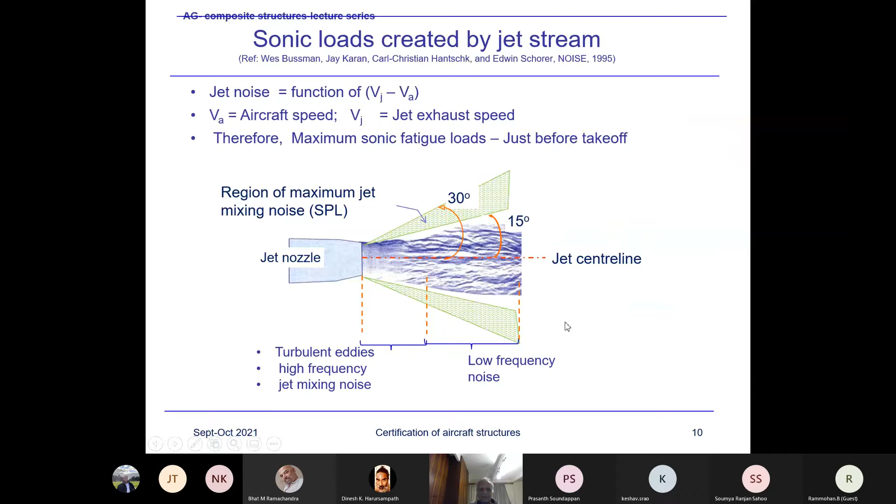Okay, so I think there was some question regarding sonic fatigue when I showed some slides. I think these are the slides which were there in that original certification presentation. And I've got some slides to give the feel of what happens for sonic fatigue spectrums. A lot of testing work has been done by various aircraft industry organizations and NASA to determine what sort of dB levels would be encountered during the various flight regimes. There's a lot of work done by NASA.

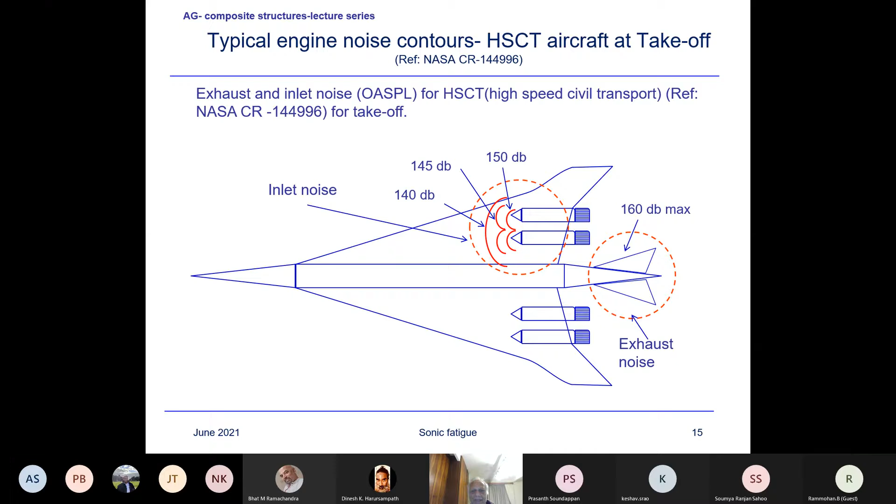So what I have done, I just copied some figures. This one is measured for high-speed civil transport, work done by NASA with the help of other industries, which is published in this report reference. This is showing, for high-speed civilian transport with an arrow type of wing, various contours for the overall sonic pressure levels at various locations of the aircraft. Now, this is all based on test data. Essentially,

they simulate the test during the flight by putting the sensors, and they measure SPL. I mean, they measure the acoustic response, which is then converted through a lot of analysis, which I don't understand too much about, power spectral density, and then to the sonic pressure levels. And then it's converted to OASPL, which is overall sonic pressure levels.

So essentially, these are the contours for various sound pressure levels. And as you can see, in this region where the engine is, the highest noise occurs. It's like 151 decibels, 153, 150. So high OASPL zones, 150 to 153. And as you go away from the jet exhaust, these drop. So they are lightly loaded.

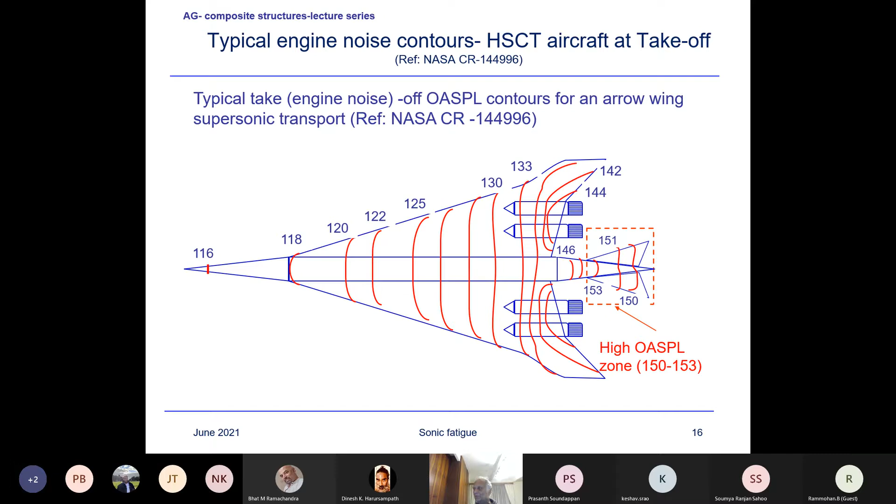If one wants to consider what type of coupons could be tested, I sent one of the test reports on sonic fatigue, maybe last week, where test data for some coupons are given, or probably that can be found in some AGARD report and ESDU sheets also.

Some of the slides here show typically the sound pressure level, SPL, with octave band frequency, because this can be converted to either octave band or 1/3 octave band, the response, sonic pressure loading versus frequency. And using this, one can also analyze the response.

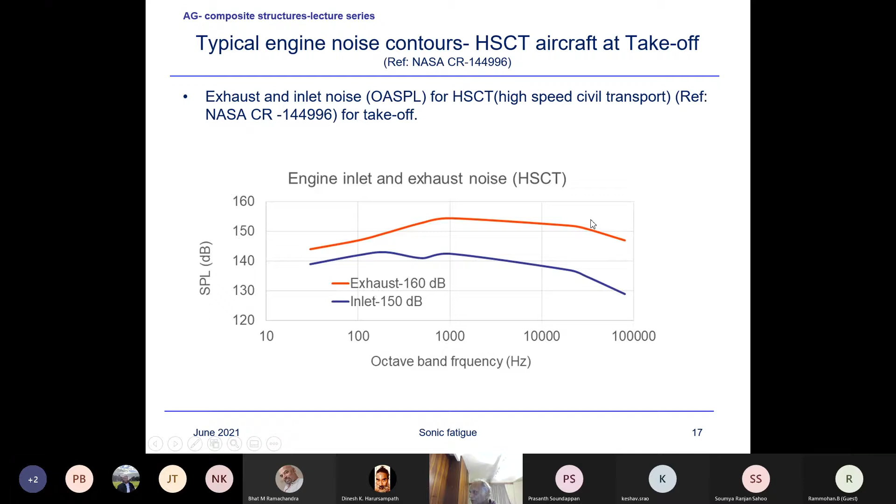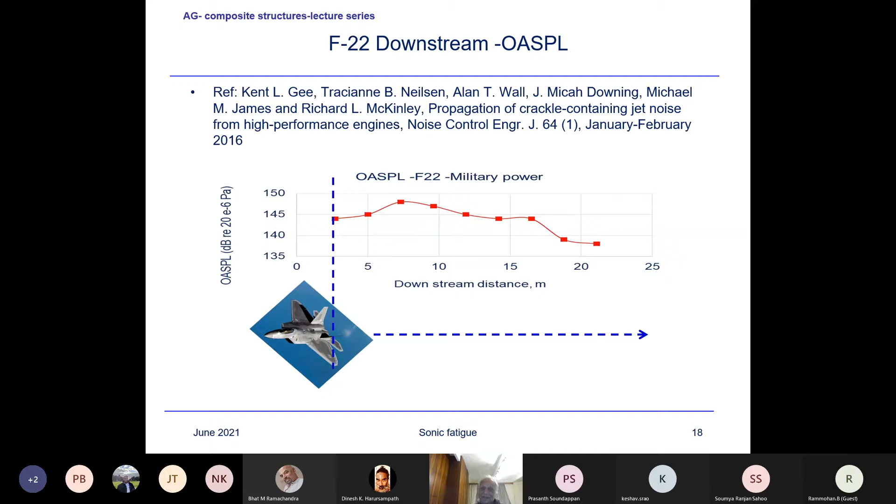And this is for a military aircraft like the F-22, downstream. Here the jet engine is the reference, and you can see for the F-22 how overall sound pressure levels vary as you move downstream from the jet. So it's a typical example. There are a lot of references available, and those who are interested can read in detail about sonic fatigue loadings. But I just wanted to give some idea.

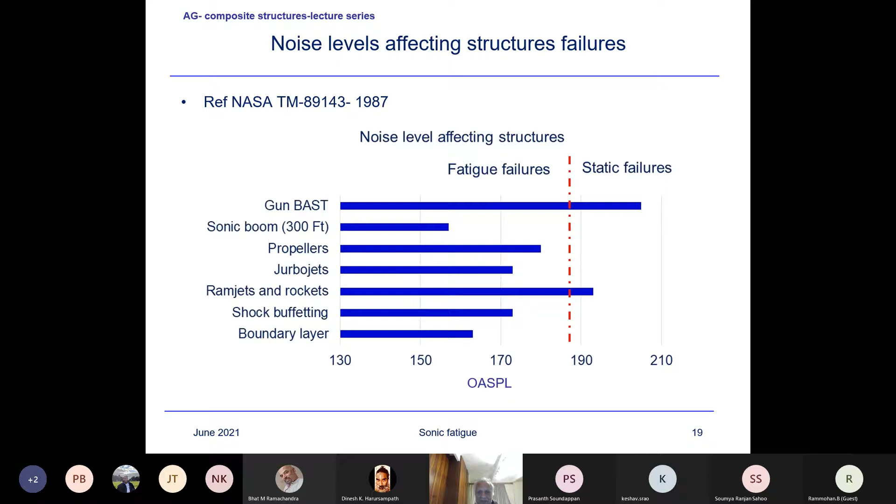And this I've taken from one of the NASA reports, which shows the fatigue failures and static failures for the noise levels which are created. So you can see gun blast, sonic boom, propellers, jet engines, all that. It's not very important. And this one I showed.

Okay. So what happens for the analysis? I'm only trying to state a few points, and the details are given in the ESDU data series, if you have access. Suppose you have a panel and the noise is generated. The panel will respond to the noise spectrum, and it will create some kind of sonic pressure loading with frequency. There will be a number of frequencies generating it, and then one can determine the SPL variation.

Okay, now, there's a relationship for determining what happens with this response when you want to determine the fatigue margin for failure of the joint, or wherever maximum stress occurs on the panel due to sonic fatigue. So you want to determine the margin. Usually one can use the procedure from ESDU.

So the response SPL is a function of RMS pressure. The SPL is nothing but pressure application, so it will be fluctuating pressure applied to the panel. The panel will be vibrating, and it will create several modes, mode 1, mode 2. Now you will determine the lowest mode natural frequency for the panel.

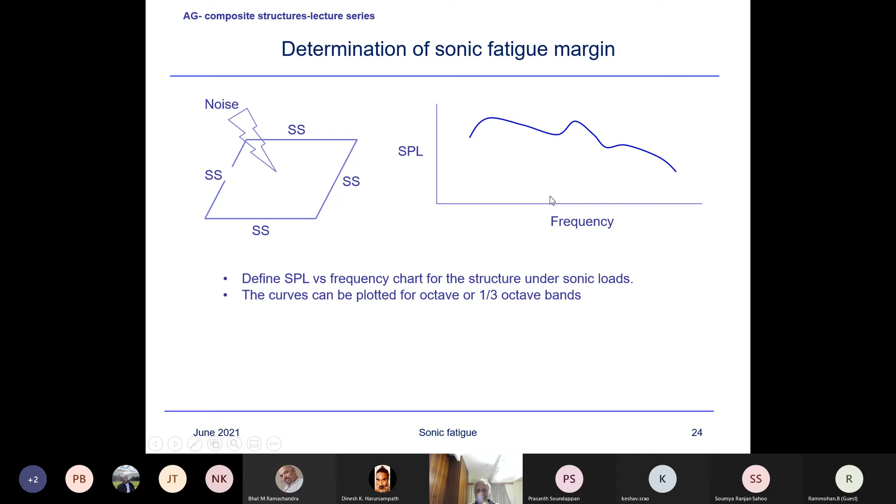The knowledge which we have from the fatigue spectrum is SPL, which is sonic pressure loading. And from the frequency calculations for a particular type of panel, like simply supported, fixed, curved, rectangular, or any type of panel, you can use the handbook or methods from either ESDU or some other references or AGARD reports to determine the natural frequency. So essentially the sigma RMS stress is equal to pi by 4 delta Fn function.

This is natural frequency. GP is spectral density of acoustic level at fundamental frequency. Now this is the parameter which has to be determined using the handbook. I don't have a simple relation for this one, so I have not written it down. This has to be determined from ESDU data series for the noise, that is for a particular SPL. So I've defined modal damping ratio delta, and Fn is of course the natural frequency.

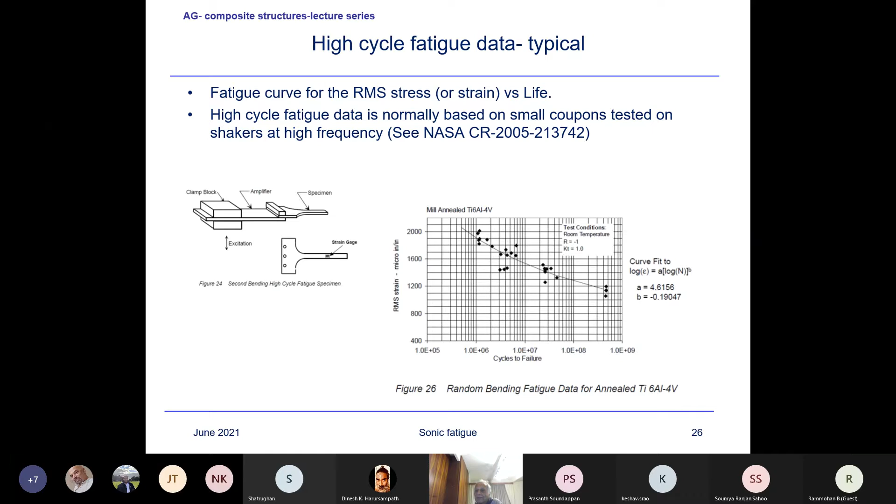Now somebody asked about the temperature. Yes, temperature. If temperature is affecting a particular region, you have the temperature correction factor or some SN curve available for the temperature effect. And that one can find in ESDU. Using that with the temperature, you can determine the margin. So this is only a general method, and it's not a very detailed procedure, but it is just to give you a feel for how you can determine it.

Any questions? Somebody asked a question regarding some details on sonic fatigue. Is it enough or do you need some more information? Yes, sir. I have gone through whatever you have referred and sent us, sir. It's enough, sir. That's enough. I'll go through it. So is it okay? Yes, sir. It is useful, sir. So do we have access to ESDU data series? I'm not sure, sir. Okay, NAL does have it because NAL has used this procedure.

Okay. Sir, only one small thing: when we design for RMS value, there will be some loads which will still be higher than the RMS value, like a peak load, right? So will that also be automatically taken care of? Well, if it's a dynamic effect, with the sonic one there are two things being done here. You are analyzing the sonic spectrum over here. Then, in fact, there are mechanical loads coming into the picture over the whole of the fatigue life.

What happens? The sonic fatigue occurs, say, during takeoff only, about 1 minute. And then you have a mechanical cycle with loads going on. Now, normally one would have a mechanical fatigue analysis, and combining that mechanical fatigue and acoustic fatigue, the final margins will be determined. So you're right, there would be some higher loads in different cycles. So that should be taken into account.

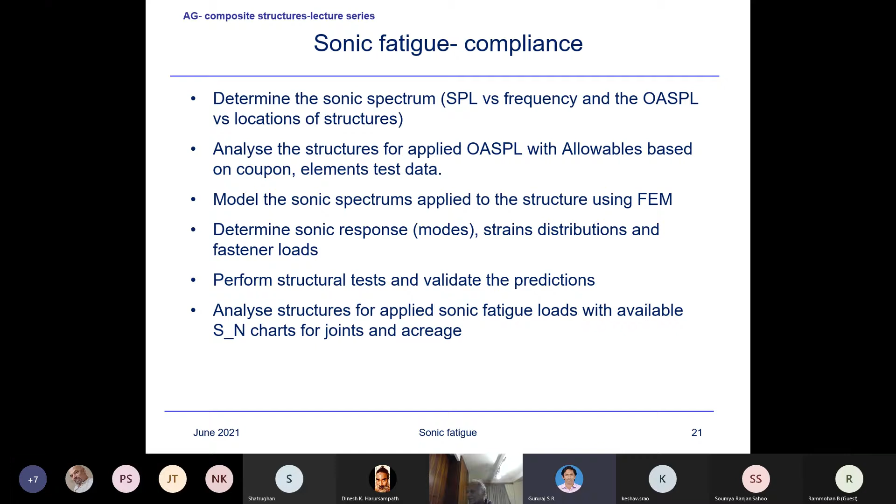Okay, sir. Fine. In fact, I deleted one of the slides from here. Let me just pull out another presentation. Okay, now. The question which you're asking is, okay, let me just show. I should have included that, but I deleted that slide from here.

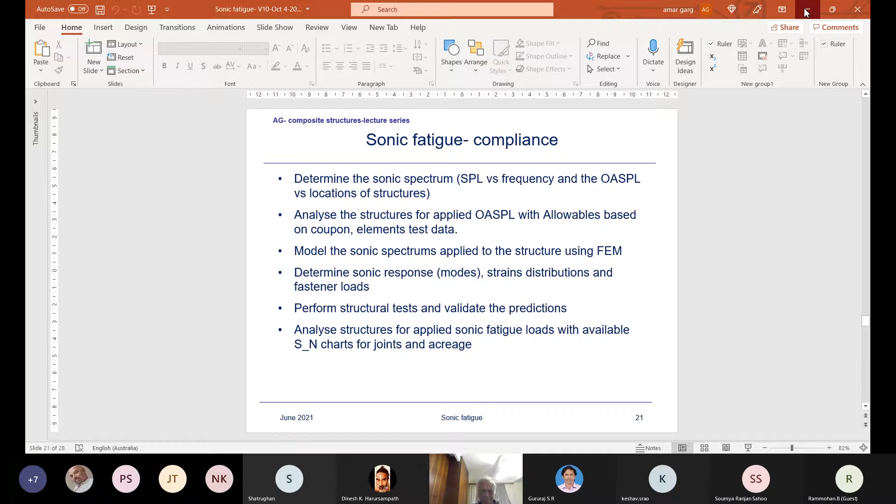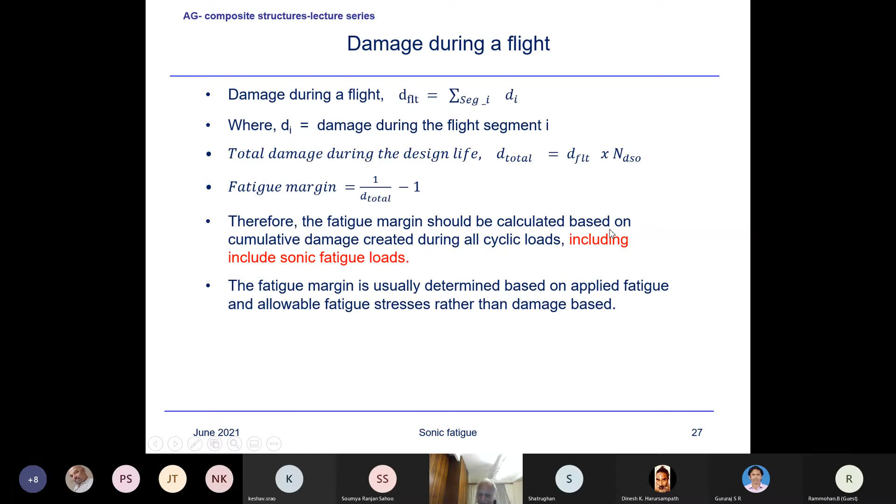So you're right, there were higher mechanical cycles. Yes, one has to consider a full flight envelope. Okay, sir. In fact, this question was asked by ADA people also, and that is how I prepared this chart for them, to demonstrate that the margin has to be considered for the total damage, not only this local sonic fatigue.

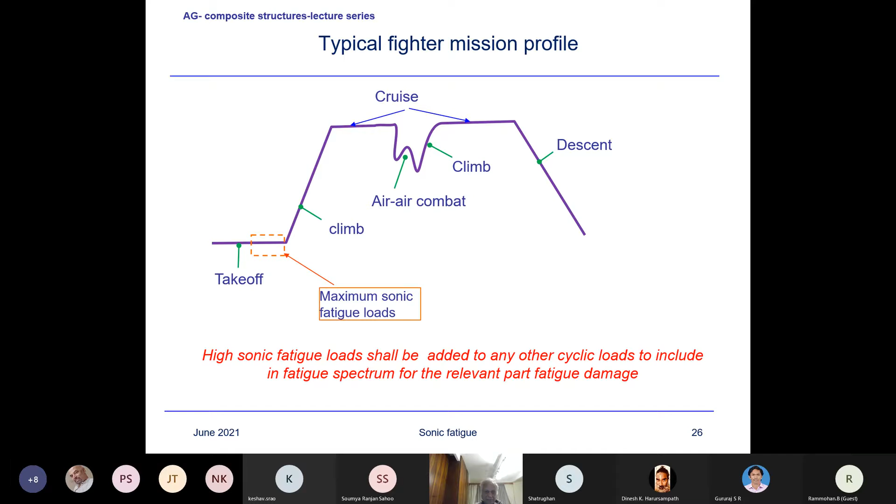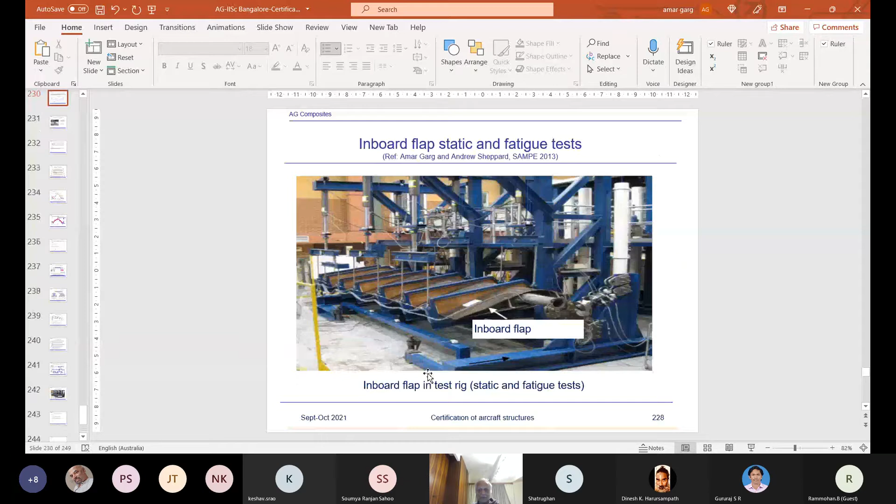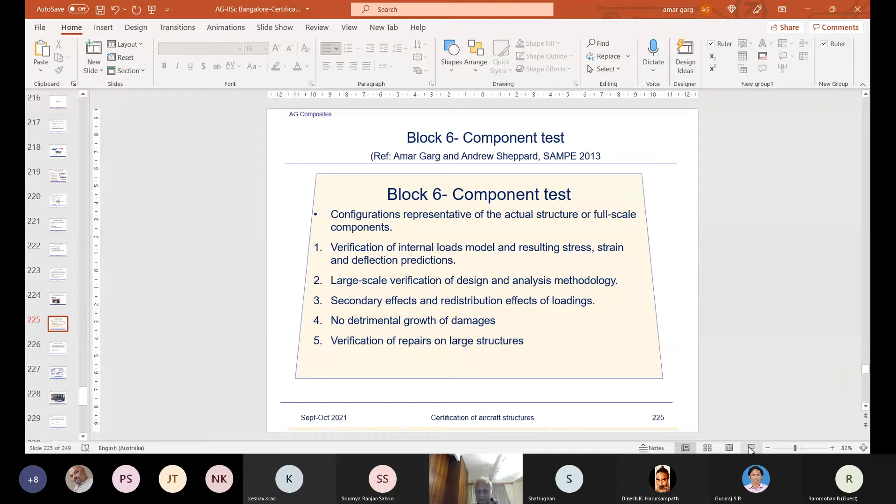Okay, now I'll just close this and go to the main presentation. You can see this presentation now, component fatigue test? Yes, sir, we can.

Okay, so this is what I wanted to complete last, because this is an important test for the aircraft, and as I had said, the regulatory requirement is to demonstrate the fatigue compliance of the aircraft by full-scale test. This is a component test, but in the end I have taken a slide from Boeing for the 787 fatigue test, and we can run the video a couple of minutes.

Now, the objective: a component fatigue test for this inboard flap was performed. The principal structural elements for the trailing edges are outboard flap, inboard flap, and aileron, and the flaperon is non-principal. So to demonstrate fatigue compliance for movable trailing edges during the 787 program, we tested only the inboard flap and demonstrated the equivalence to others.

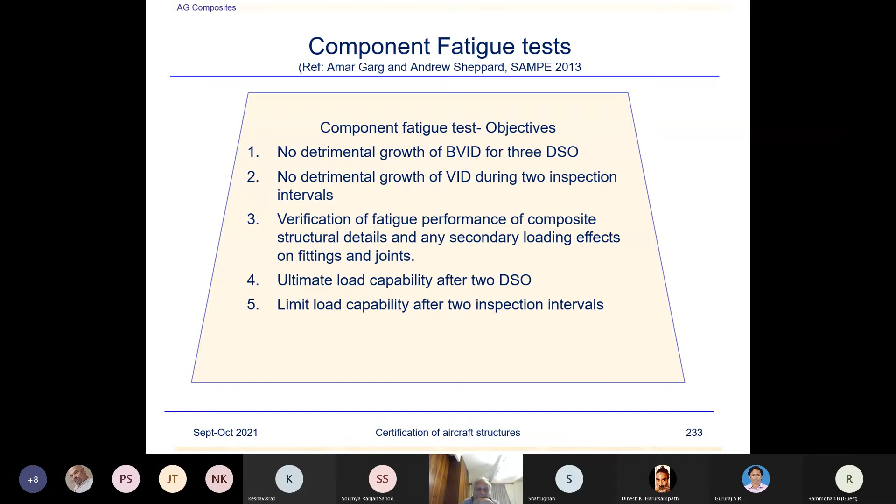Verification of fatigue performance of the composite structural details and any secondary loading effects on fittings and joints. Ultimate load capability after 2 DSO. Limit load capability after 2 inspection intervals.

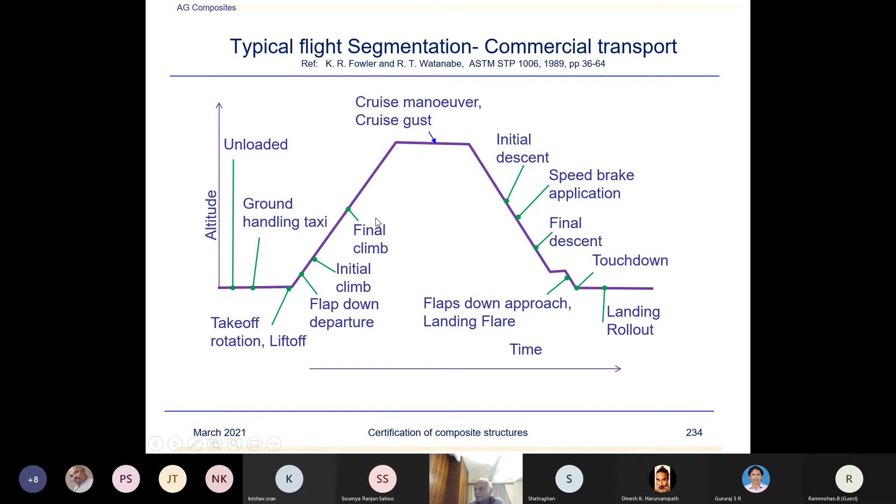Now, typical flight segmentation for a commercial transport. The flight profile: takeoff, rotation, lift-off, unloaded, ground handling, taxi, lift-off, flap down, departure, initial climb, final climb, cruise, maneuver, gust, initial descent, speed brake application, final descent, flaps. During each of these segments, there are thousands of fatigue cycles applied on the aircraft.

Now, in order to generate the spectrums for fatigue, a lot of analysis is done, and I won't go into the details of how you derive the fatigue spectrum from the loadings.

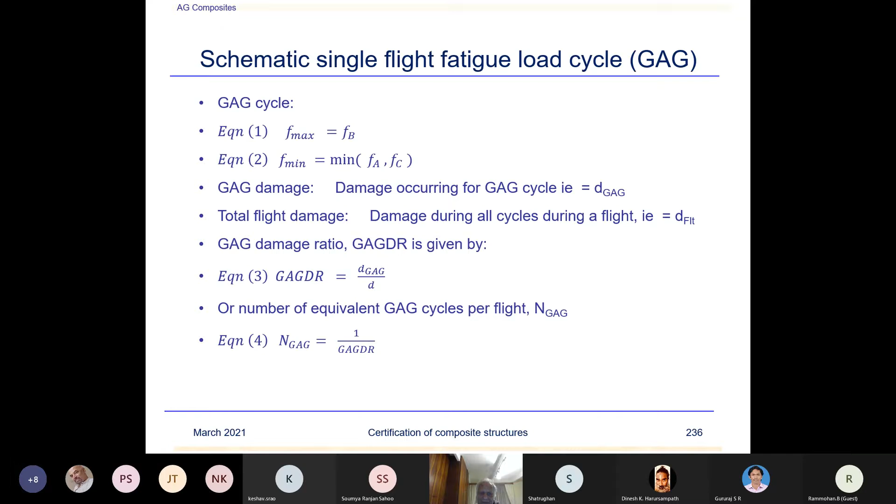Once we have a GAG damage ratio defined, then we can define the number of equivalent GAG cycles per flight. We want to define GAG damage ratio in order to generate the equivalent GAG cycles. How many equivalent GAG cycles will give me the same damage which is created by all these thousands of cycles of different amplitudes? This is handy in determining the fatigue margins for the structures. I just wanted to show this as a definition, because if I'm talking of GAG damage ratio and somebody asks what is this, that's why I thought I'll try to explain.

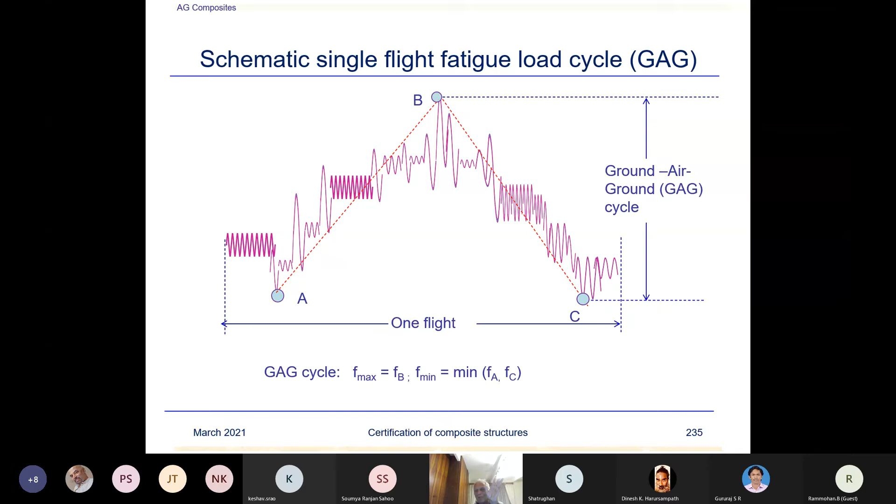So full scale test, generally what happens, suppose you have a metallic part. Now metal is highly sensitive to the fatigue spectrum loading, low-high, high-low cycles. When you want to test a component or subcomponent for the metal, you have to apply the right type of spectral loading in order to capture the effect of the load sequencing. It's very important.

However, if we are testing a composite structure, we can take advantage of one phenomenon: composites are virtually not affected by the load sequencing. Whether you're on high-low or low-high, it has insignificant effect on the life. But in metals, it can have a drastic effect, as I showed with the Comet failure test, where they caused the overloading effect, which gave an artificially very high life. So it is very risky in metallic structures not to use a proper type of fatigue spectrum.

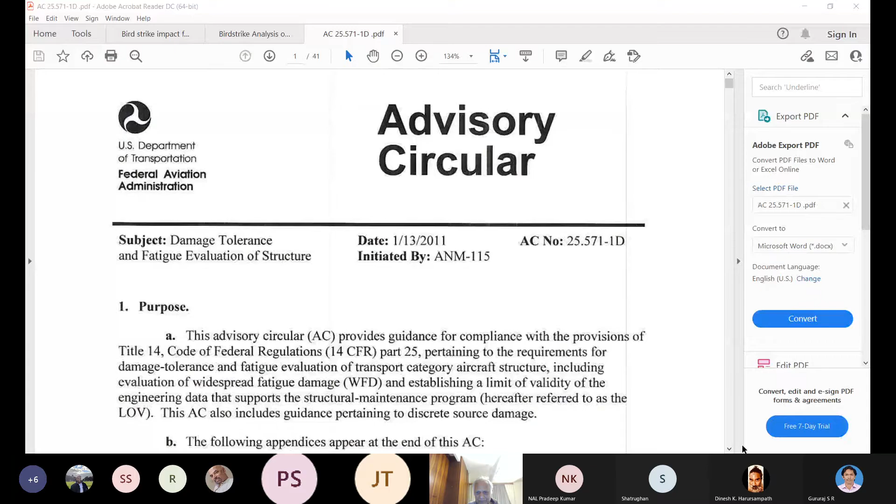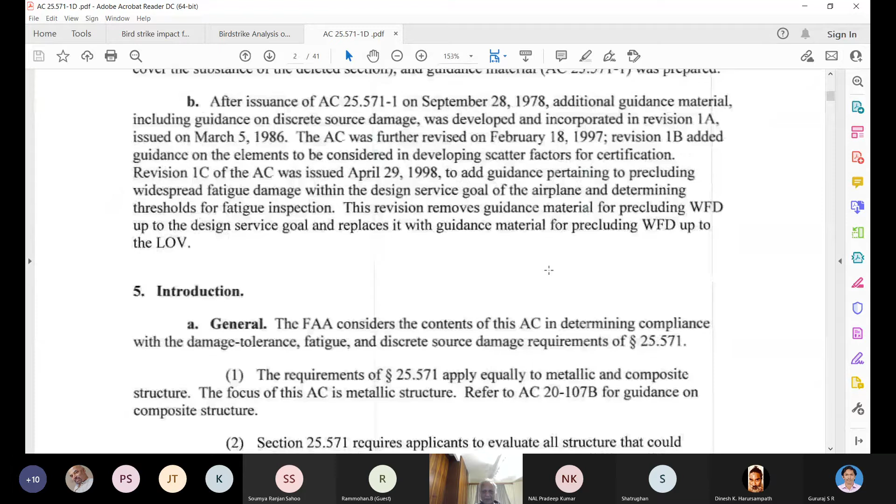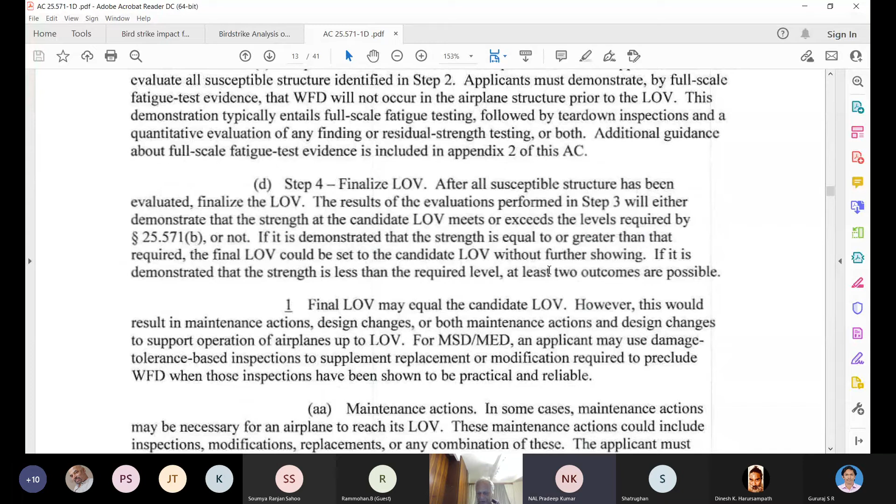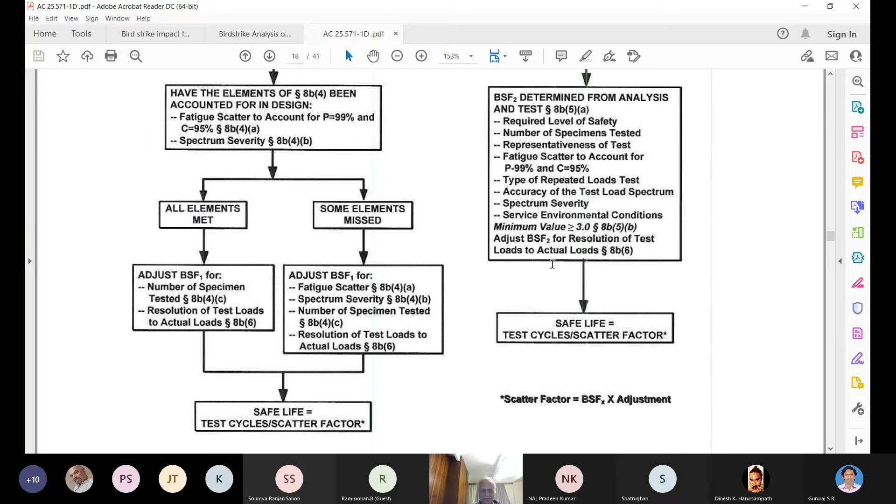Okay, this is the one, advisory circular 25.571-1D, and it provides all the guidelines. Here I'll show you the fatigue guidelines for these structures when you are testing, and one has to meet this requirement. So for a metallic structure, it's very clearly written here - this is a requirement from the safe life point of view.

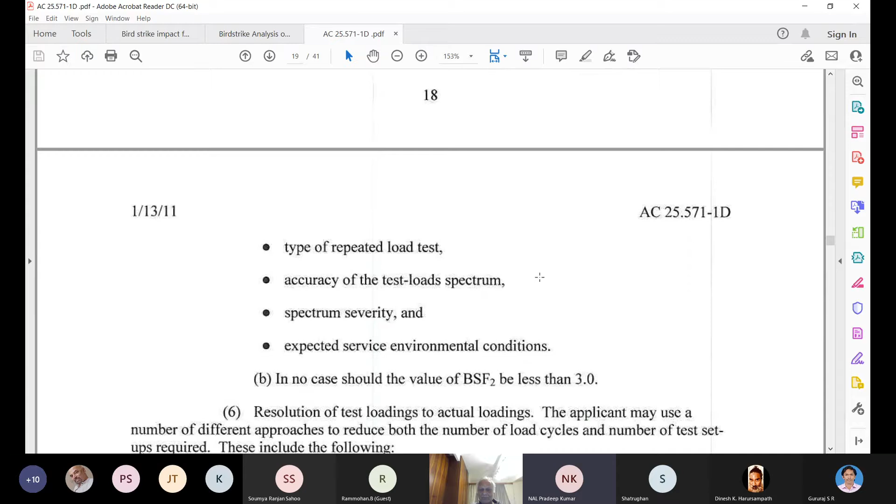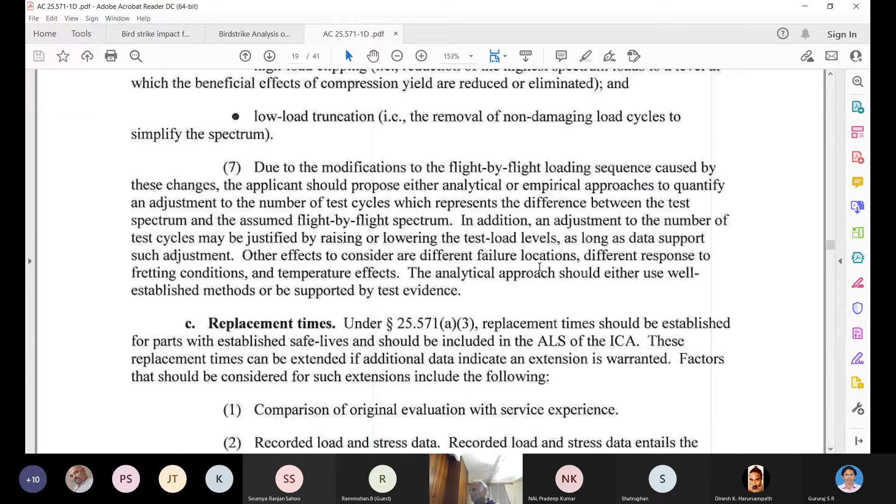Sir, we have to do both safe life as well as damage tolerance, both approaches we have to use, sir. No, safe life you're not doing - you're not trying to determine a safe life. Actually it's a damage tolerance approach. But there's a requirement for the aircraft to be tested. The requirement is design life, whether it's a metallic structure or a composite structure. The full component has to be demonstrated through design life.

And for a metallic structure, you would do the cycling loading using spectrum loading. So you have to decide about the spectrum loading properly and run for 2 design lives - that is a requirement. Sir, this spectrum loading we have to find from the mission profile of the aircraft, right sir? Professor, yes it is - it is a mission profile which has to be analyzed, and it's not easy actually. It's a very complex method which Boeing uses.

Sir, Professor, is it possible to get from the literature any reference to find the load spectrum? I have the mission profile, Professor, I want to determine the load spectrum. Yes, I can send you the reference. There's a full ASTM STP written by Mr. Watanabe - he was a Boeing employee, earlier Boeing engineer. He had done a lot of work, and it's in public domain because he was editor for that ASTM STP. I'll send you that paper also - I think I copied it.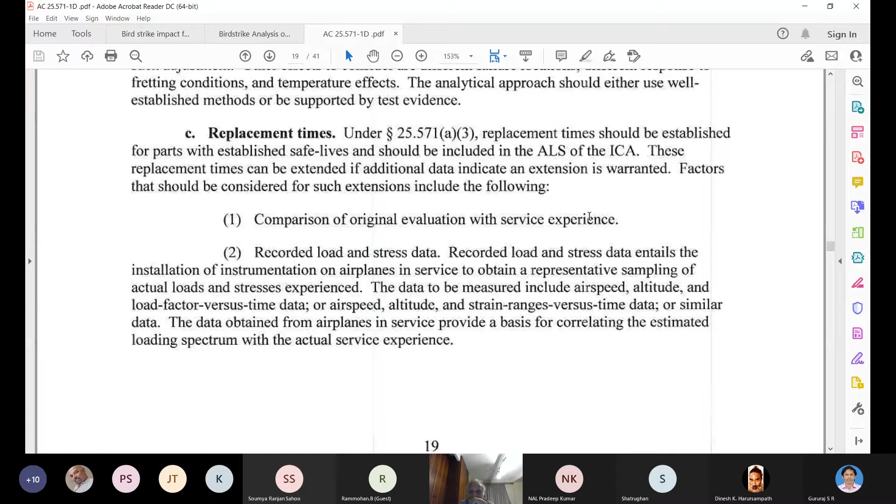But in general, I'll send you the references, and probably you might get some feel. But yes, you are right. This 571D provides the guidance for safe life, for damage tolerance, as if you look into that FAR requirement, it's 2 design lifetimes for damage tolerance. And then there's widespread fatigue damage. There should be no damage occurring during that time.

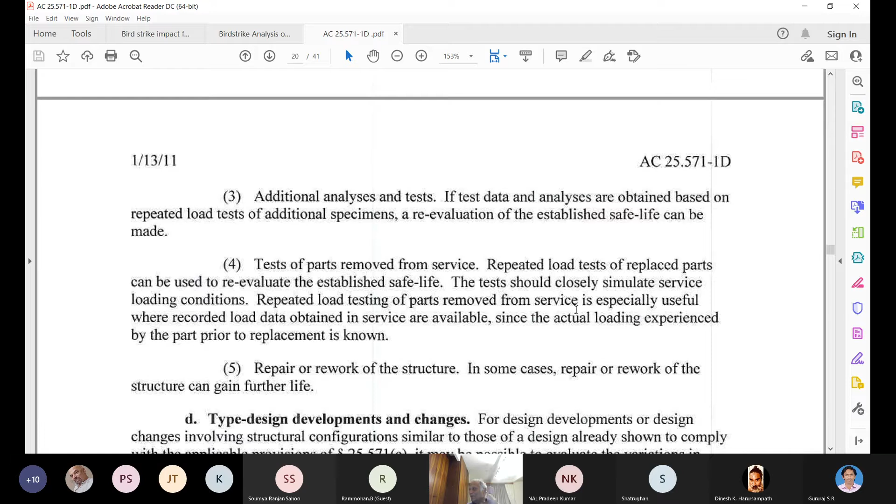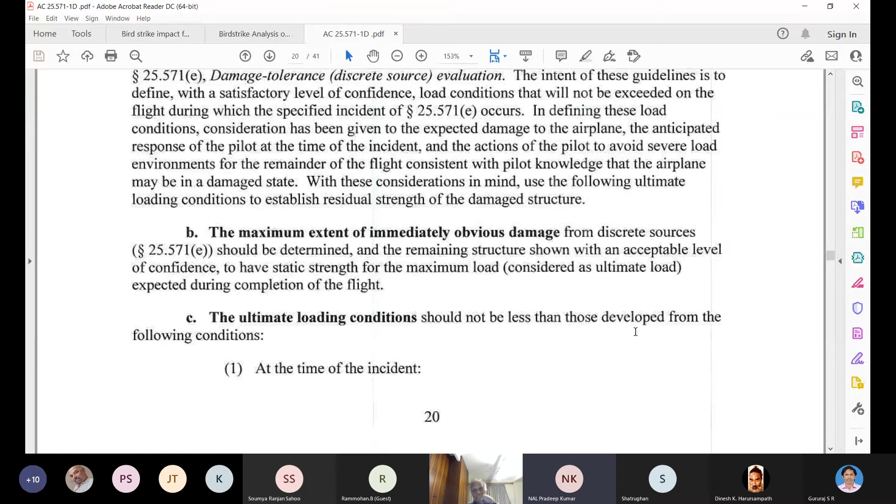So what do we do, Professor? We'll find the critical component in the fuselage. Okay, 1 or 2 critical components, and we'll do the SN approach, find the life, as well as crack growth study also we'll do for the damage tolerance analysis.

And damage tolerance analysis you have to do for each of the parts. There would be a lot of analysis because for different fasteners, you have to consider how much is the minimum crack length assumed, and then determine and calculate the widespread fatigue damage if it occurs. So of course you have to cover all the critical areas, you can just highlight some zones where the criticality is there and try to analyze the structure.

This is again a very involved procedure by the industry. Once again, Boeing has got its established procedures over such a long period of time. They have the handbooks, computer programs, hundreds of people working in that group on fatigue and damage tolerance, and they do all that work.

So yes, Professor, we also have our aircraft program for which I am actually responsible for determining the load spectrum for the fuselage. So that's what I do at NAL, Professor, and Professor Dinesh Kumar happened to be my teacher during my PhD at IISc.

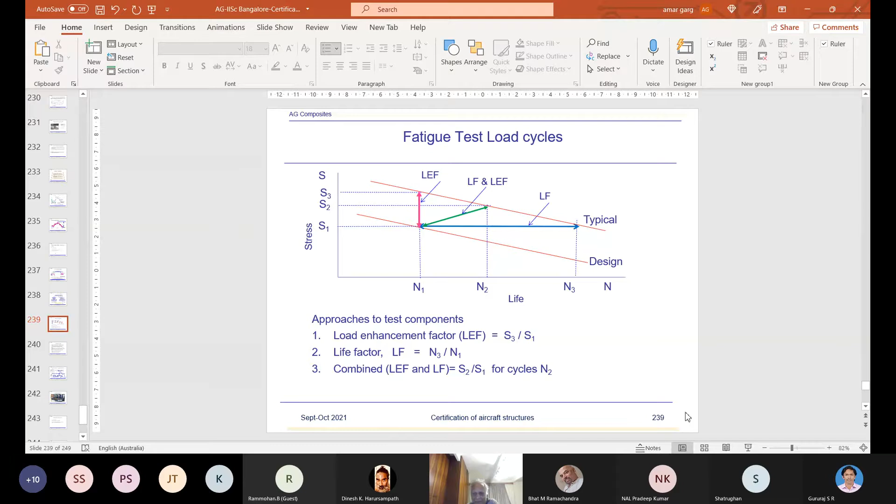Sir, you told about life factor. So as far as I understood, first we do some coupon level testing, then we find the load factors, and then while doing component level testing we use these load factors, right? You can calculate both life factor and load factor from the same coupon. Oh no, I'm talking about metals, not composites.

Okay sir, what about when we do damage tolerant design and calculate fatigue life using the famous Paris law with sigmoidal curves? Well, damage tolerance doesn't use this curve. Because there you need the dA by dN, Paris law, dA by dN charts, and the stress intensity factor. This is when you're trying to use the endurance limit approach, then this is useful. Otherwise, damage tolerance uses only dA by dN.

Yes correct sir, that is in the Paris region, na? Yes, Paris law, classical. And then of course you apply lots of correction factors like accelerated crack accelerating or decelerating, depending upon the cyclic loading, compression, tension, overloading. So there are a lot of factors going into that. And in fact there's a publication written pretty good by one of the Boeing engineers.

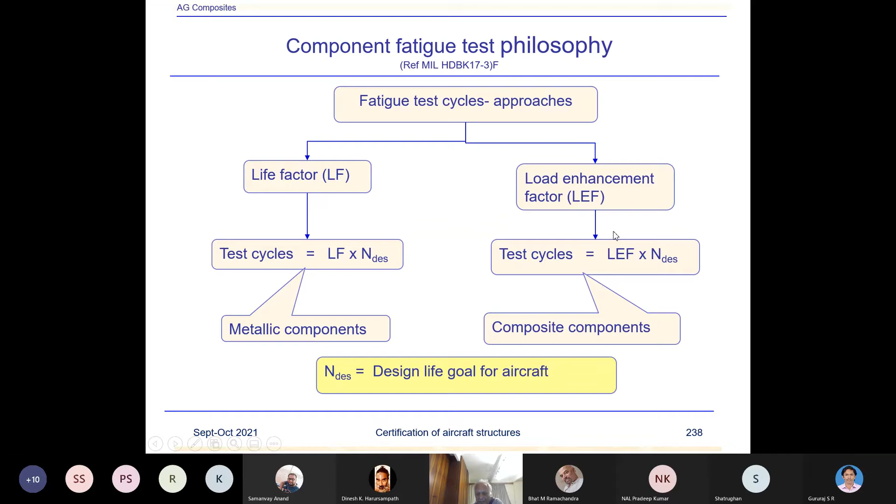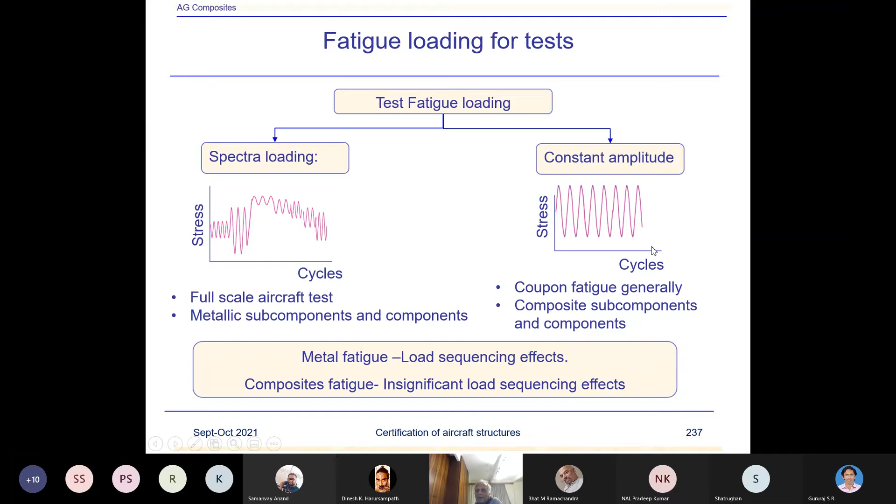Okay, next one. Fatigue test article. So we are talking of, say, inboard flap fatigue test here. Basically for this flap testing we use this method and constant amplitude loading rather than spectrum loading, and I won't go into the details of why we chose that.

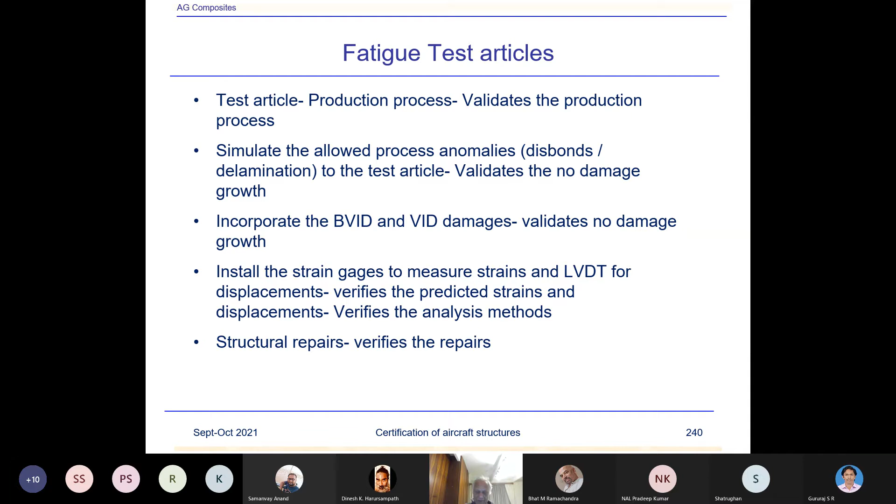So the fatigue test article was created with all the damages which we wanted to study, BVIDs, VID, to determine a particular life. So I'll go into the test flow. Say a test article with production anomalies like disbonds and undetectable damages like BVID. Mounted on the test rig, then of course a strain survey just to verify that all the systems are working okay, strain gauges are working okay, and then you start the fatigue loading.

So here we consider, say, 2 DSLs. 1 DSL, then you stop the test, visual and NDT inspections. Then again you go to another DSL. So this is the requirement. Basically, the FAR requirement is for 2 DSL with the appropriate load enhancement factor. So we tested this for 2 DSL, 2 design service lives, with an appropriate load enhancement factor. Because we were not applying a spectrum loading, we applied the enhancement factor. That was the reason. In order to generate 2 DSL life.

Then we loaded to static limit and ultimate loads, in order to verify after 2 DSL that we still have the residual strength available to the ultimate load carrying capability as per the requirement. Then we introduce the visual damages. Visual damage, slightly larger damage, like an impact using a 4-inch impactor, say, a visible damage which is easily visible during walk around inspection.

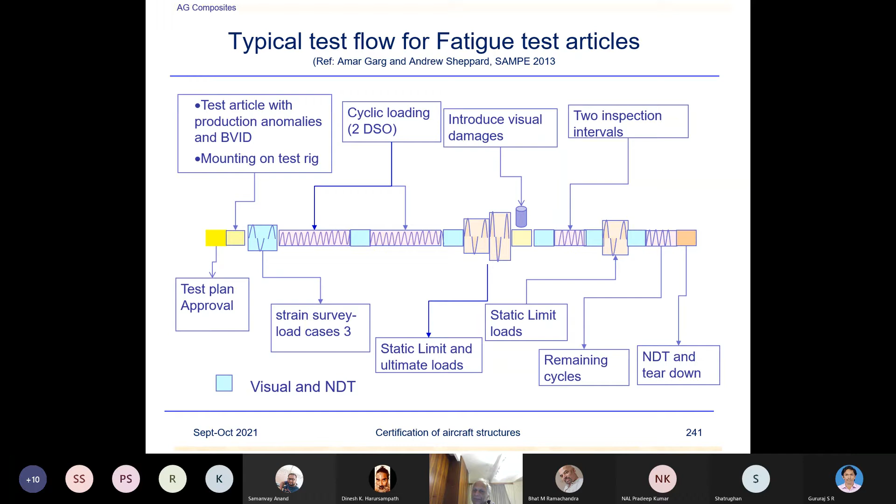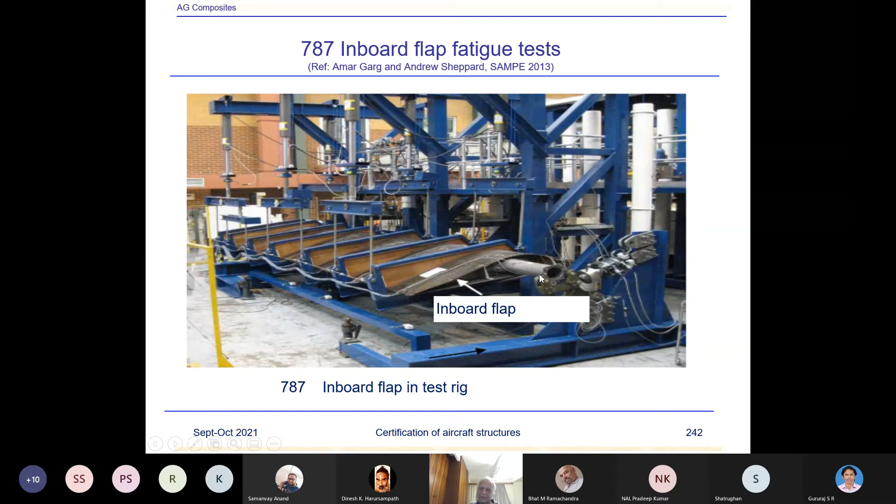And then, of course, NDT and tear down inspection. We found no damage to the structures anywhere. And that is how, using the fatigue test article, compliance was met for the fatigue test. This is just showing the flap, which is similar to the static test. Okay, so inboard flap fatigue test summary. The inboard flap fatigue test was successfully performed without any damage growth. Design service objectives were met. Based on the inboard flap fatigue test, other MTE structures were validated to meet the regulatory requirements. So that is how it was completed.

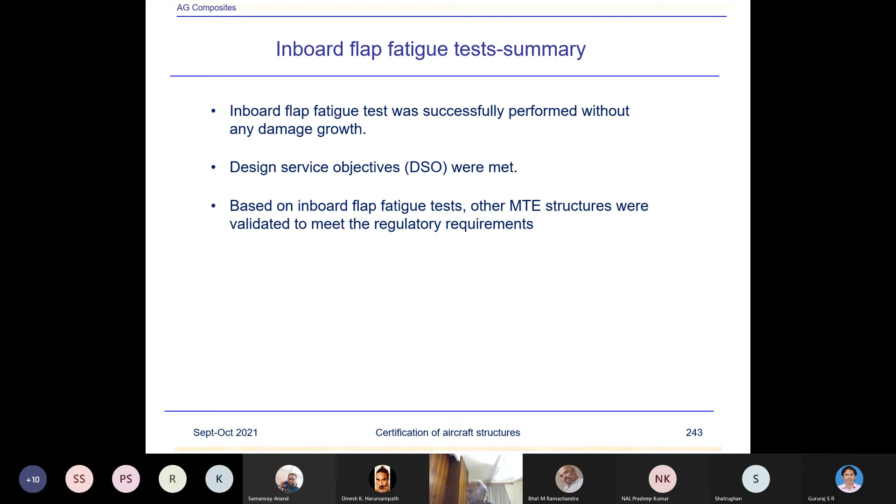Okay, now this completes the 787 movable trailing edges discussion regarding the certification process. So that is the end of this. And then I have just put the requirement for the full component test. Of course, this was not done here because it was not our responsibility. We were only for the main movable trailing edges. Headquarters, Boeing Seattle, had to demonstrate the compliance requirements for the aircraft by testing the full-scale aircraft. So it was done in Seattle. For a couple of minutes, let's see this video.

So it's not playing. Oh, sorry. No, we are not able to see it. So how do I make it? Does it go to the presentation? You will have to share the browser where YouTube is playing, instead of the slide. Is it okay now? Not yet. So how do I see? You have to share that screen where YouTube is playing. Okay, let me see now. I don't see it on my screen. Share. Are you able to see now? Yes, we can. Okay, so I'll start from the beginning again.

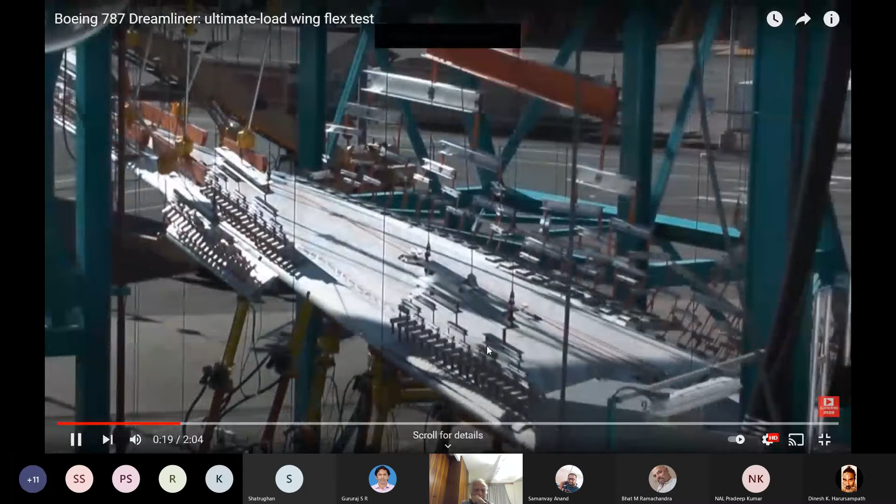How much is the wing deflecting?

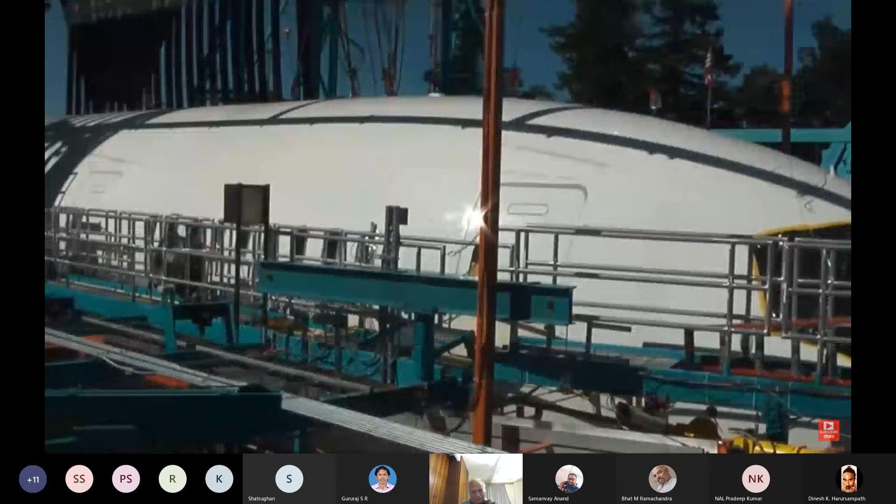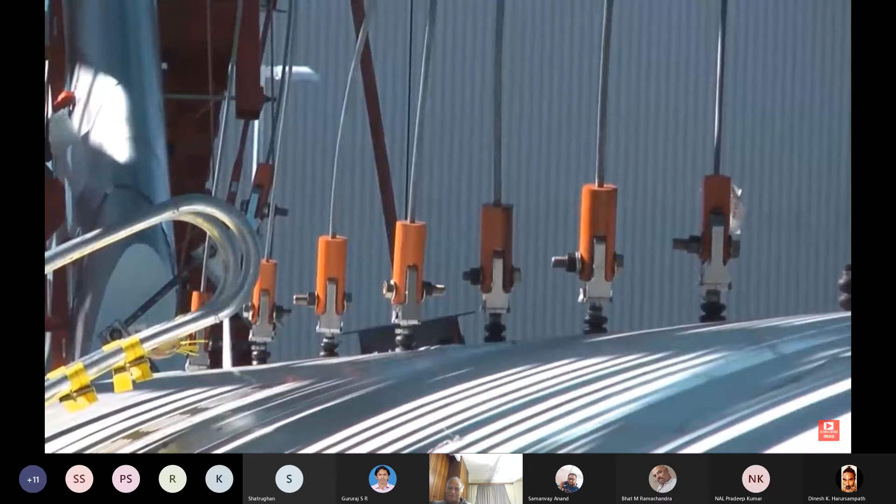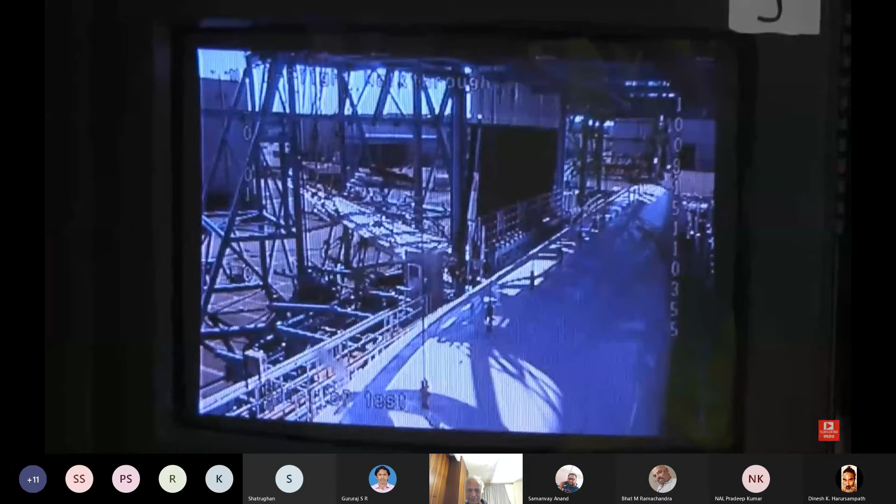Is there any sound with the video, Dr. Garg? Because we are not able to hear. Pardon? Is there any sound along with the video? No, there's no sound. This music which is playing, that's the only sound. Can you hear some music? That's it. I think this one can be stopped now. So essentially this, okay. Oh, sorry, it started running some other video. So basically, you can watch it again on YouTube.

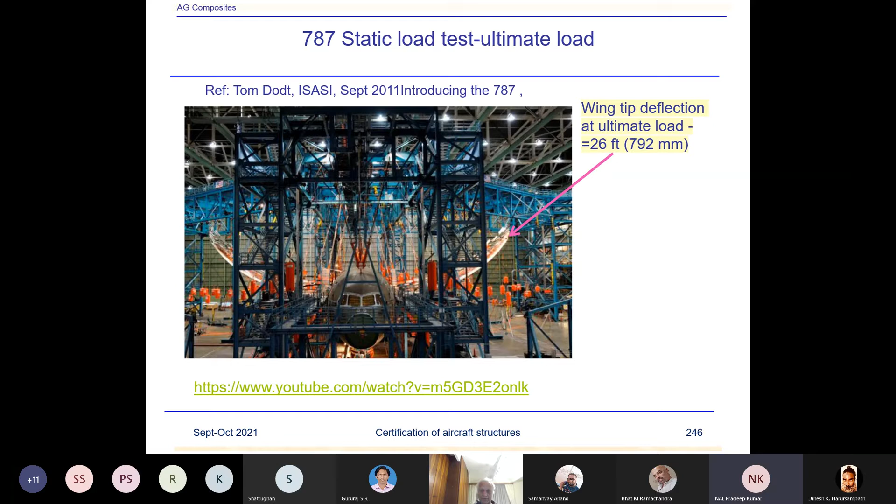Okay, now it's a good question. Can you see the screen? Yes, professor. Yeah.

Okay, now read this requirement. There's a mandatory requirement from the FAA that a full-scale fatigue test of the aircraft has to be done. As you can see, the airworthiness limitations section of the instructions for continued airworthiness required by 25.1529 must specify that no airplane may be operated beyond a number of cycles equal to half the number of cycles accumulated on the fatigue test article until such test. So current regulations require the full-scale fatigue test of aircraft, and this is mandatory.

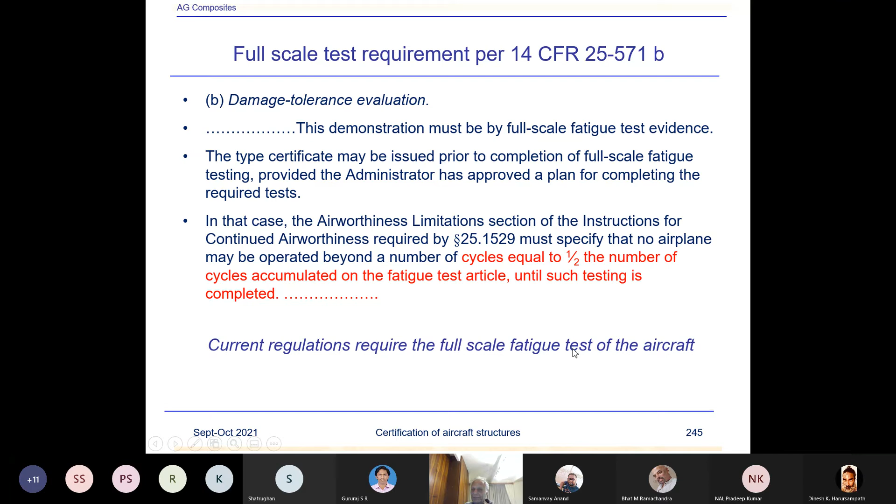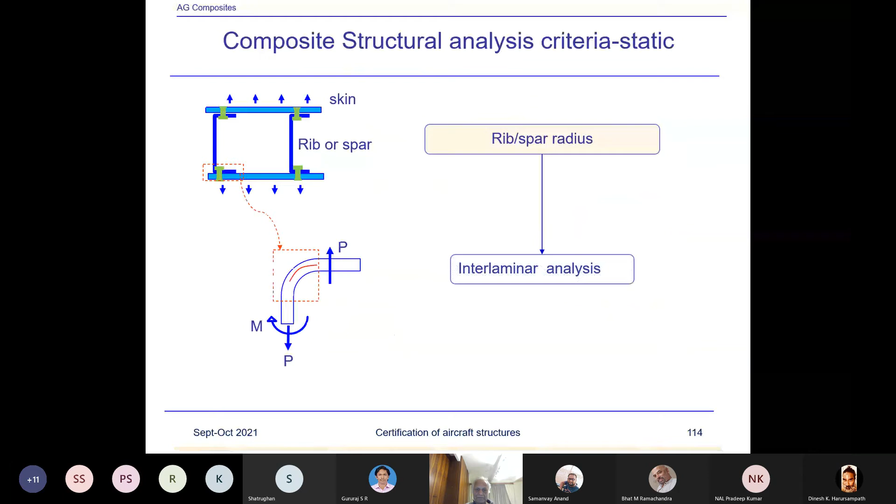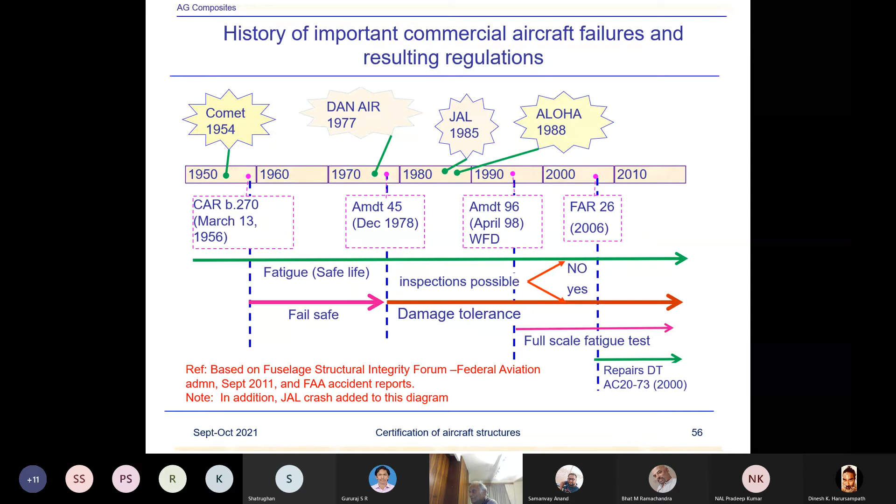Now, if you look into this diagram, which I showed in damage tolerance, let me go back. This diagram, history of important commercial aircraft failures and resulting regulations. When the Aloha aircraft failed, then the requirement of widespread fatigue damage came up. And then the FAA imposed a requirement that the full-scale fatigue test is required. So the FAA will not approve any aircraft design until the fatigue testing has been shown. They won't certify.

Sir, is there any certification for thermal fatigue?

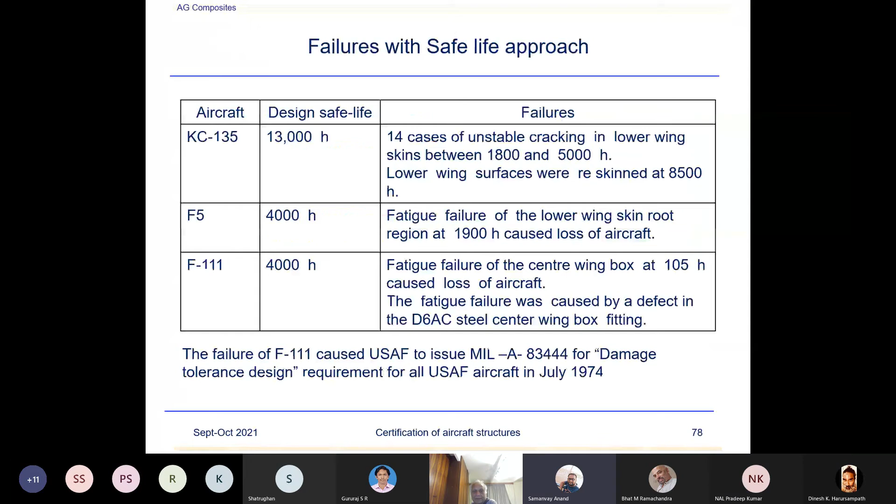Well, thermal fatigue, normally for the temperatures, you would take into account the effect of that during your detailed design. But full-scale testing is not done for thermal, for commercial transport, or even military aircraft. For this thermal one, the environmental effect will be shown for the component design when you are doing detailed design using the coupon test data. Suppose we are dealing with, I showed you the inboard flap fatigue test.

Breaking, sir. Pardon? Hello, sir. I couldn't hear you. Your voice was breaking. Can you repeat it, please?

Yeah, what I'm saying, full component tests are done only at room temperature. But environmental effects are considered for your detailed design of the structure. Say, for example, we are showing inboard flap fatigue testing. It was done at room temperature. The static testing also was done at room temperature. But you would ask me about the operating conditions for composite materials, because composite materials are highly sensitive to moisture and temperature. So how do you determine? Yes.

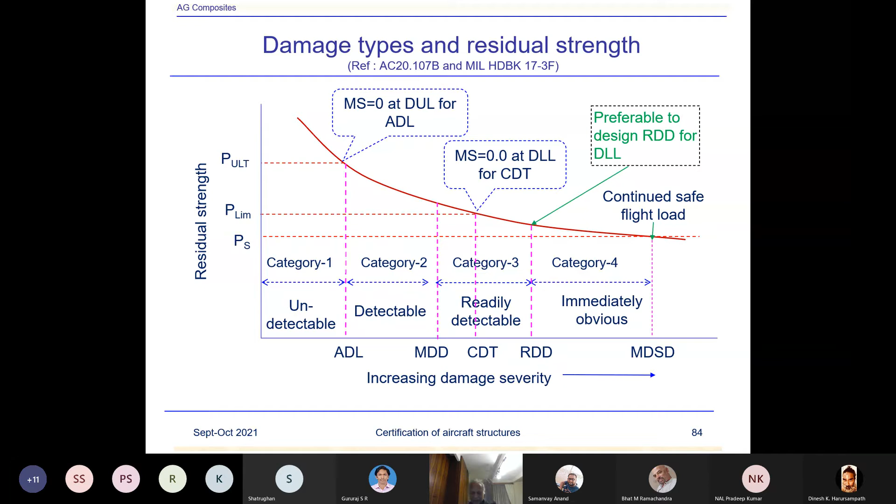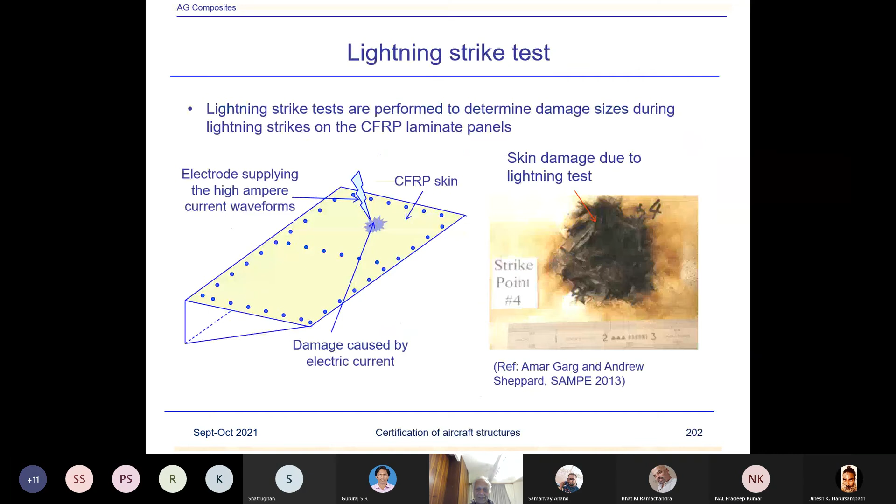And as I explained, when you are talking of verification by test, the component test is done at room temperature, say the inboard flap test was done at room temperature. And we are trying to verify that the analysis is able to predict the structural behavior. You test in order to simulate the prediction of strains by your FEM method and match it with the test data.

So you would have, say, hundreds of gauges on a test component. You are testing at room temperature. You determine by test the strains and then verify that your analysis is also able to predict the strains. And as I explained, we had to match the predicted strains with the test data within plus minus 5%. And a lot of work was done to refine the model in order to generate the same strains. So that means you now have enough confidence in your analysis method.

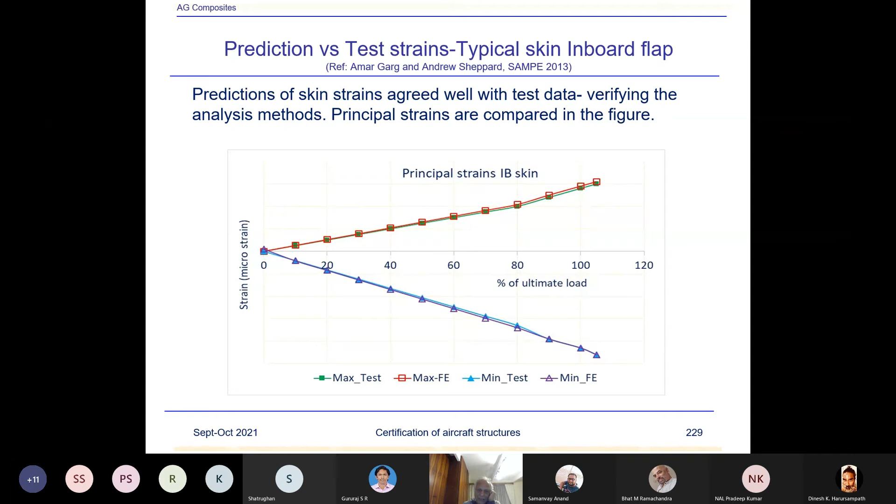Okay, so once you have verified your analysis method, then you don't need the test data to determine the final margins for static or fatigue. So what you do now, I know my prediction of strain on, say, somewhere on the skin. Say I pick this point here, my analysis is predicting 2000 microstrain. I use that 2000 microstrain because that is the strain I'll get from the test also.

What is my allowable? Say the room temperature allowable based on the coupon at room temperature is 5000 microstrain. But with the hot wet condition, it's a 4000 microstrain allowable. So in order to define the margin, you would use the 4000 microstrain as the allowable. And that gives you the environmental correction, because you are using the allowable based on your environmental correction factor to consider the hot wet condition or a cold condition.

And the failure mode, if it's a bearing test, bearing failure, open hole fatigue test, or BVID, or tension, different conditions. So environmental considerations are satisfied by the analysis based on the allowables developed for the temperature.

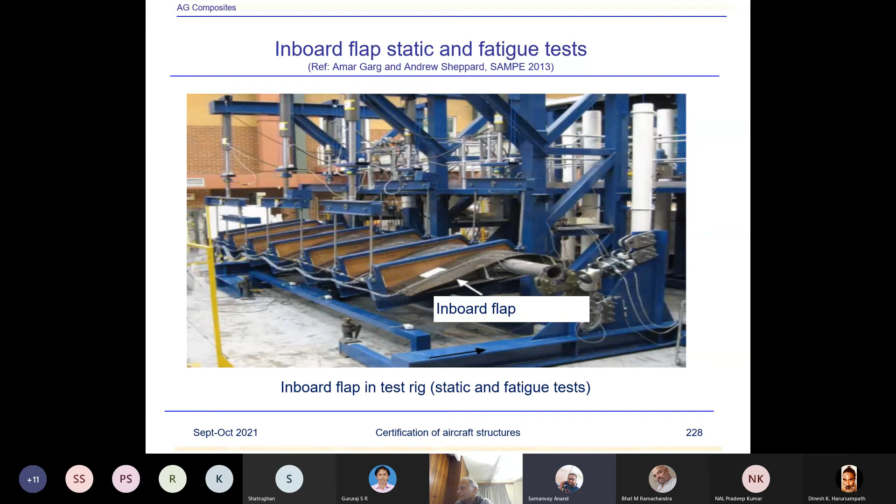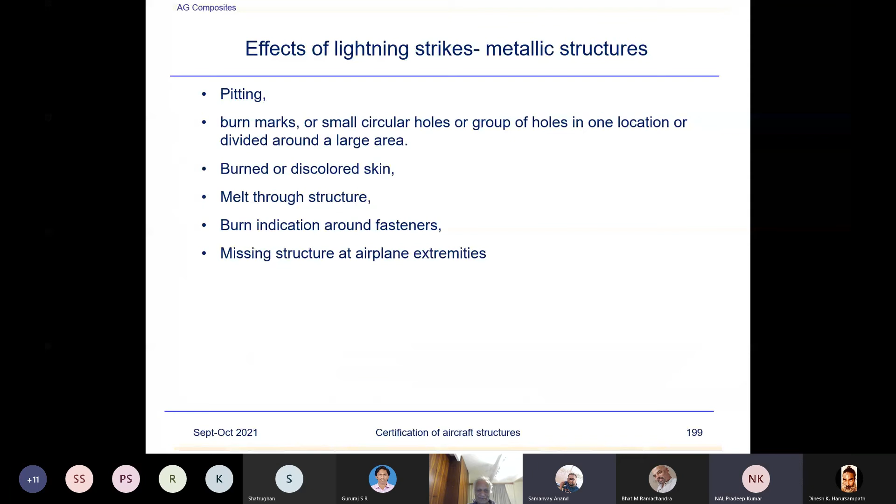Yes. Sir, that environment correction factor, how do we determine that? By using some tests only? Yes, surely. They are tests for the coupons, but you don't test the component. Yeah, this is what I was talking about, sir. Okay, I got it, sir. On coupons, we look in the test matrix I discussed here, like a typical allowables test. You are testing modulus, tension, multiple batches, test conditions: cold, RTD, hot, wet.

So the knockdown factors of environments come from the coupon test data. That is how you get the confidence, and you apply the correction factors using the environment, and the testing of the component or subcomponents, large components, will normally be done at room temperature. Because if you're doing a point design approach, then you have to test with the environment, by the way. So there's a difference. But if you are doing the certification by analysis verified with test, then you do only the room temperature test for the component. So it depends on the philosophy of certification.

Any other question? Sir, Professor, you mean the allowable will take care of all the environmental effects? We don't have to do the analysis or test other than room temperature? Well, when you are analyzing the structure, yes. If it's a metal to composite interface, you have to consider environmental correction factors for the analysis. Because if there is an interface between the metal fitting and the composite, you have the fasteners, and the operational condition is cold or higher temperature.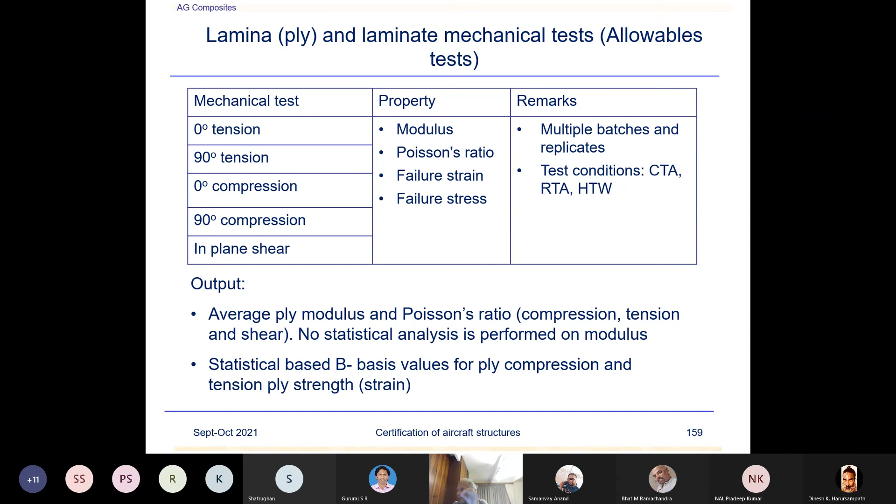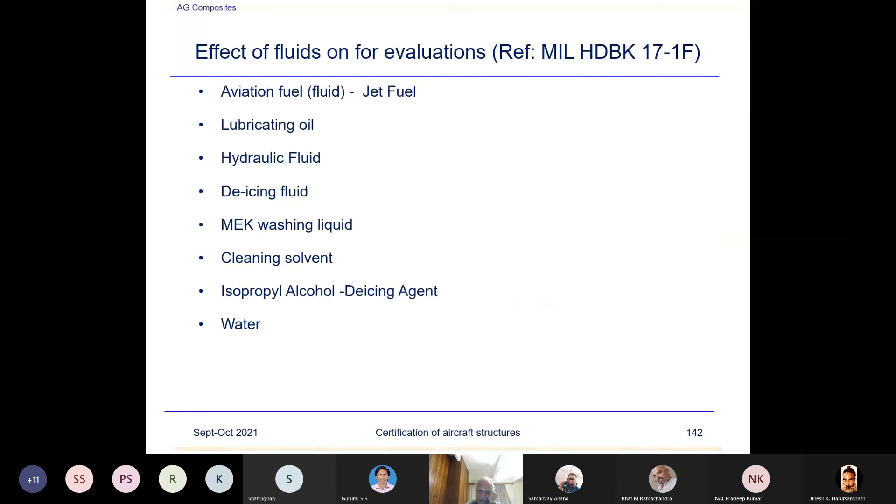Suppose for the composite, my maximum fatigue stress based on the spectrum analysis is a particular amount of strain, the maximum operational fatigue stress or strain. Using that maximum strain level, which is like a GAG cycle, you determine the GAG damage ratio. Using that damage ratio, determine the number of cycles for the life of the aircraft and the maximum stress. Using that maximum stress and number of cycles, and then an S-N curve, I tried to show you the compliance for fatigue for composites.

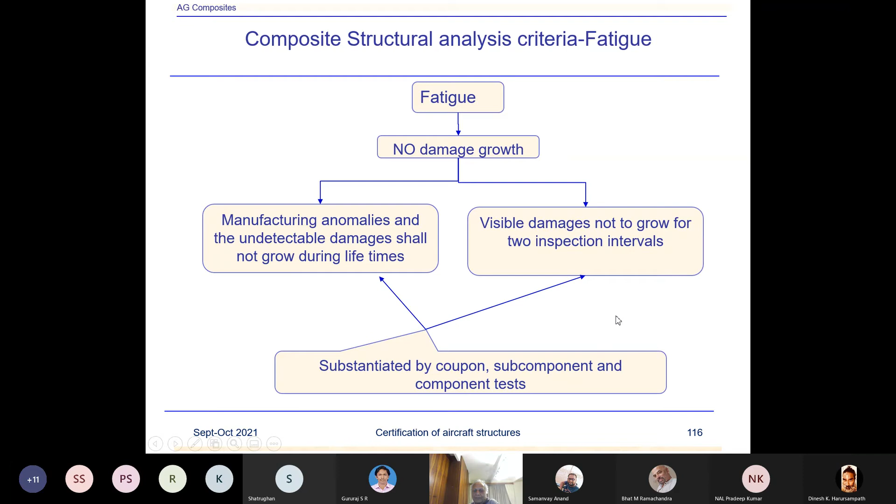So fatigue compliance philosophy for a composite is no damage growth. Manufacturing anomalies will not grow, visible damage will not grow, substantiated by subcomponent and component tests. We use the endurance limit approach for composites. The reason being, the damage tolerance approach, like crack propagation rules, is applied for metal. In composites, there's nothing like the Paris law phenomenon.

You can't determine it. The damages don't propagate like in metals where a crack grows. So it's an indeterministic approach, whereas in metal it's a deterministic approach. So in composites, the general philosophy is the endurance limit approach. So what happens in the endurance limit approach? You have a typical fatigue spectrum. Based on the spectrum, I know what my maximum stress is.

Determine the GAG damage ratio, as I explained to you. Based on that, suppose GAG damage ratio is 0.5. That means one GAG cycle is creating about 50% of the damage created by the total fatigue cycles in a flight. So suppose the life I want to design the aircraft for is 50,000 flights, and 0.5 is the GAG damage ratio. That means I require to analyze it for 100,000 cycles.

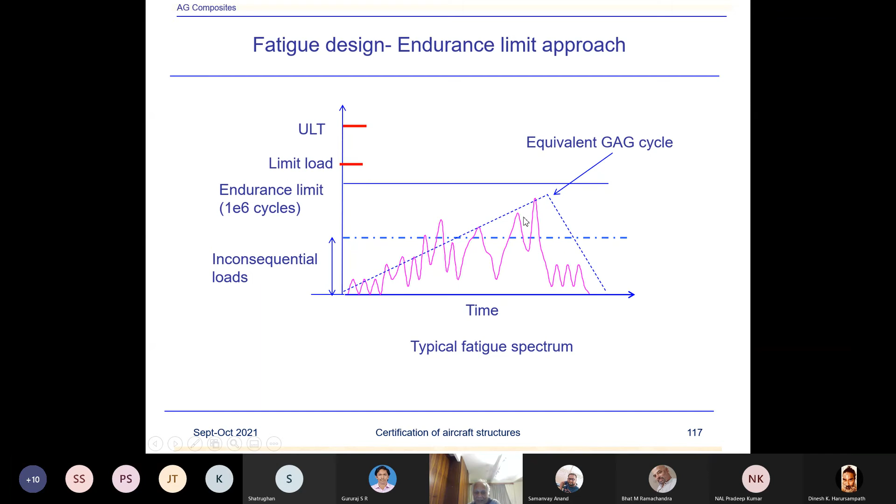And then using that endurance limit approach, we have the SN curve generated for a particular mode of failure. If it's a joint, for the joint, for open hole fatigue, and normally we define the endurance limit as 1 million cycles. So you have an SN curve, which is B basis and 95, based on the test data generated. And then this is my allowable stress or strain.

Using this allowable and applied fatigue design load, or the stress F fatigue, I'll calculate the margin. That is, F fatigue is less than F endurance, and that's it. This is my compliance process, which is no damage growth based on the endurance limit approach. So this is a general approach.

But suppose using this approach your margin is negative, you find it is too conservative, then you can assume, okay, I have my stress level applied during fatigue, some F fatigue, and I require the life only this much. So probably I can calculate the margin based on that. That's another thing. But this is a very conservative approach.